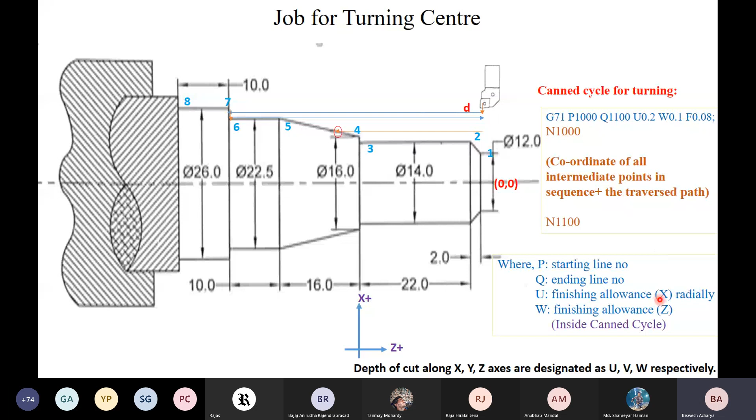Okay, still after this machining, there must be some finishing allowance. This is given by U and W. U and W means finishing allowance in X and Z direction. Okay, so F is the feed.

Okay sir, so it is necessary to write N1000 and N1100. Then why is it not written on the right side? I am not understanding, means... this is supposed to be written on the left side.

Even if we may skip all this, that means N1000, then on the next line we may start from G0 X12. Okay, so it cannot be, I think it can't be written on the right side.

Okay sir, if we are simply skipping, so because this code we defined can only write once, P1, for the entire code. Yes, so this code must be defined only once for the entire code.

Yes, yes, see, on this finishing cycle, we are not defining the coordinates again. Again, when we are writing, the control will go to this line and it will execute all the dimensions up to N1100.

Yes sir, I understood. Okay, let me proceed, otherwise you will be late for the other things.

Okay, now once the job is done, we have to go for the parting operation. That means there will be a tool change, and it will come and it will simply cut this.

Okay, so this will be a new part. Okay, so for that, what we need to do, we must change the tool. And someone asked what is G28. G28, I told that this is just zero return. Means the tool changing cannot be done from any location.

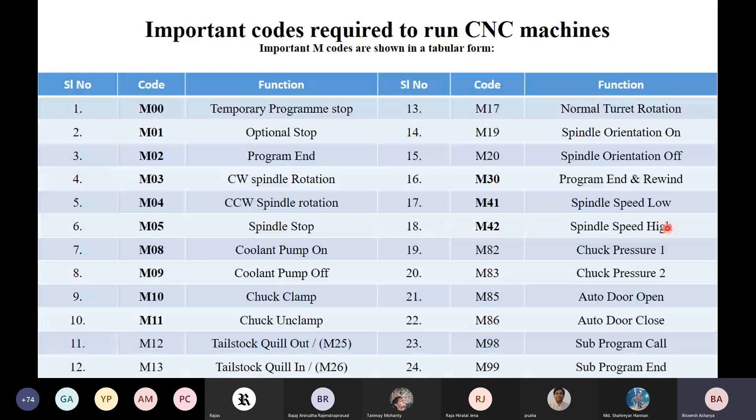M42, sir? M42. Yes, sir. The M42. Let's see again. That is M42. This is spindle speed high. That means we are operating at a spindle speed more than 1000 RPM. Okay. Spindle speed low means the RPM is less than 1000. M42 means spindle speed higher than 1000 RPM.

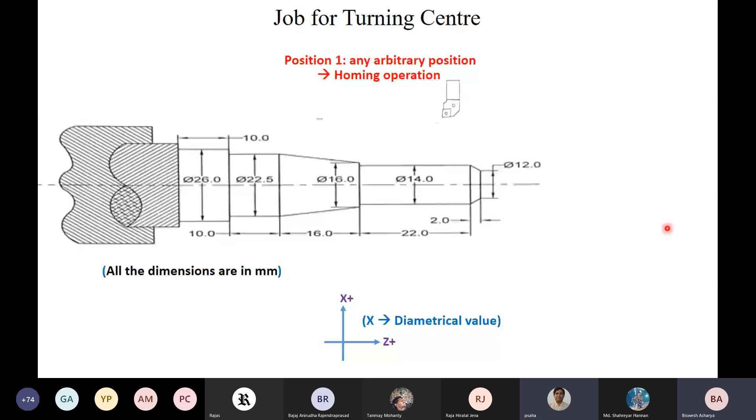Now, what is that? G0 X32. Okay, that means the tool will come to this point rapidly because there is no machining action. Then G0 Z minus 63. When we write X32 it will come to this location. Okay, and minus 63 means directly it will come to this location.

Now from this location my tool has to move up to the center, so it will be G1 and this will be a machining action. So this will be G1 X minus 1.0 at a feed of F0.2, because our objective is to cut this entire workpiece. Okay, at this point it must cut it. So we can move the tool from this point to the center, so that it will be a different part. So this is the code for that. Okay, I think we can understand this.

Sir, what is the G1 here, sir? G1 is the linear interpolation. Sir, that is G01? Same. Sometimes we can write G01 or G1 also. Both are same, sir? Yes, yes. Okay, sir.

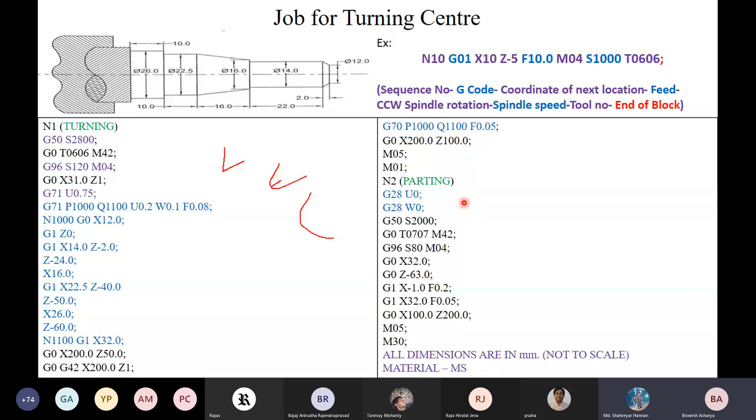So now this is over. Now we are going for the machining center, which is similar to your milling operation. See here, there will be a G40, G41, G42, but here it is not the nose radius, it is the cutter radius, because in milling or machining center we are dealing with an end milling cutter.

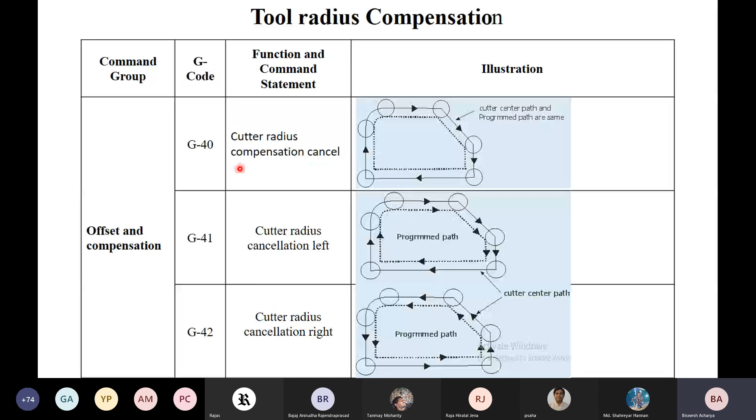Now, see, I want my tool to move from this point to this point. The tool will have some height and diameter, and we always write the code for the center of the tool. If the tool moves from this point to this point, see, don't you think that this extra material will be cut? It will deviate from the desired dimension; the desired dimensions will not be met.

So what we can do, we may move this tool to the right of this line so that my next tool position will be somewhere here. It will be like shifting the tool from this point to this point. Now, if I try to move to the next location, it will move in such a manner that this profile will be met. Is it clear?

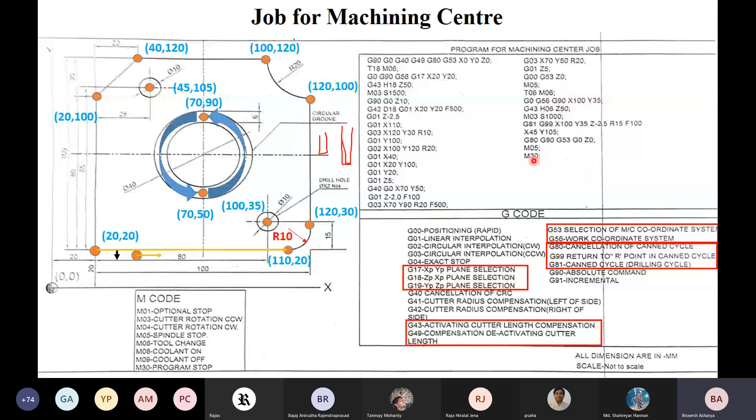Another thing: in a turning center there is one spindle, so at a time we can use only one job. But in a machining center the tool is rotating, and a number of jobs can be mounted on the same table. So for each job we can define a new coordinate system and fix it to some location, like work coordinate system G54, G56. So what is the benefit of this?

Suppose we are machining this part, and due to some reason we have an urgency to machine another part. We can stop machining this and machine the other part by defining another coordinate system. And once that part is over, we can come back to machine this part. Suppose there are 100 lines, we have done 50 lines here and switched to the other part. After that is over, we can go back to this work coordinate system and start from the 51st line.

Now let's see some of the advantages of CNC machine. So only 6 different work coordinate systems, or maybe more? I think 6 work coordinate systems can be defined, or in some machines that may vary.

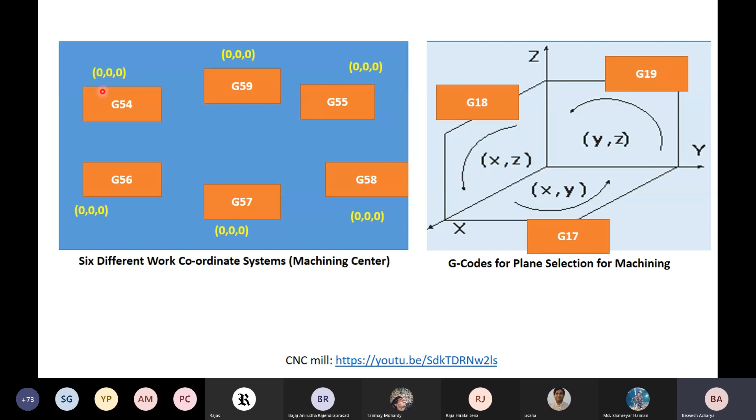Advantages of CNC machine: there will be no involvement of the operator. He just has to turn the program on and off, so less skilled people can also operate the machine. There will be some software; CNC machines can be updated by improving this software, and training can be done through virtual software. So we do not require any human intervention. We just need the human for work loading and unloading. Other things the machine will take care of itself.

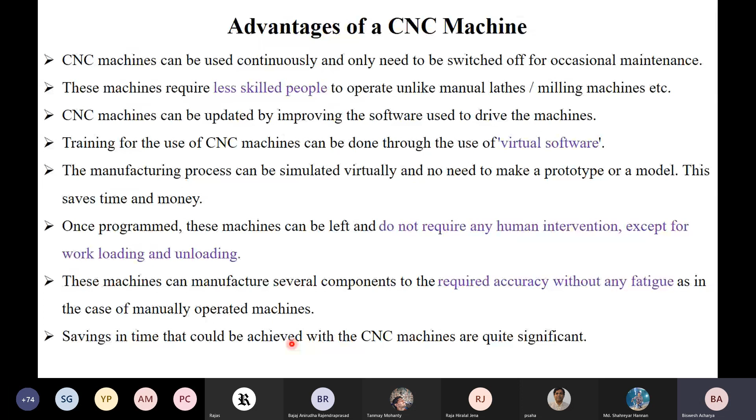These machines can manufacture several components with required accuracy without any fatigue. And significant savings in time can be achieved with CNC machines. There will be rapid actions: when no machining takes place, the tool may move very rapidly, so it saves time and may increase productivity.

Now some of the disadvantages. It is definitely more expensive than manually operated machines, and we don't need any skilled person. There is an increase in electrical maintenance, high initial investment, and higher per hour operating cost than the traditional system, which make it expensive. Suppose we have 10 conventional lathes, we need 10 workers. But with 10 CNC turning centers, one operator can operate all the machines. So it may lead to some kind of unemployment.

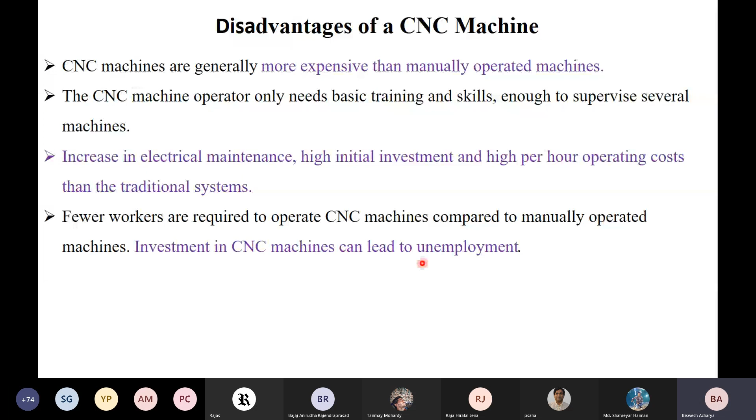Sir, are the functions of the lathe machine and the CNC machines different or the same?

So all the functions of a lathe machine can be done by this CNC machine? Yes, the CNC turning center can do them, but it will be expensive. And as I showed in the first slide, the desired dimensions can be achieved with less deviation. So there may be a doubt: if we have a CNC lathe or turning center, why should we go for a conventional lathe? That is a basic question.

In some cases we don't want this tight tolerance. If there is some deviation in dimension and that is not a problem, then to reduce the cost of machining we may go for the conventional lathe. Otherwise, suppose you have to manufacture a spindle which will be mounted on a different part. If the spindle has some deviation, it cannot be fixed at that location. So in that case we cannot do it with the conventional lathe; we have to choose the turning center.

In another way, in some cases we are dealing with costly material whose cost will be a few thousands or a few lakhs. In that case, if my part is rejected, it will be a huge cost, a huge demerit. So in that case we have to select a CNC based turning center or machining center. We can't go for the conventional lathe or milling.

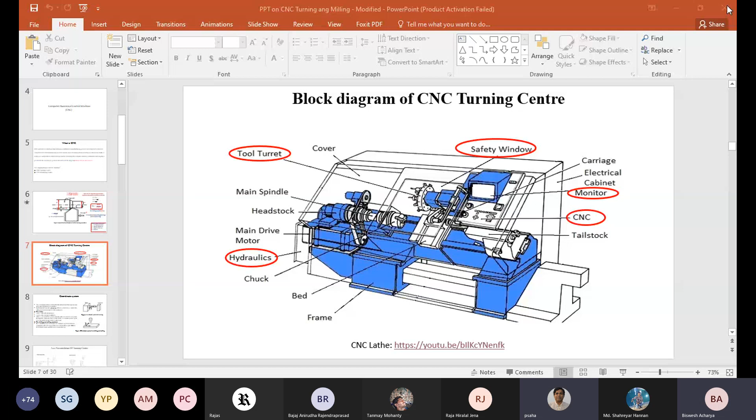I think our class is over, but we have to see a video on CNC mill. Once this video is over, we can take some queries. Should I play the video? Yes, sir. Then you may have to unshare. Okay? Yes, sir. After you complete. Yes, sir, I just unshared it.

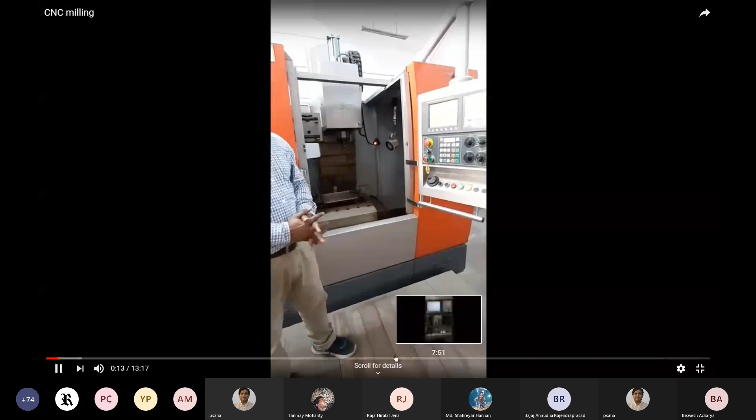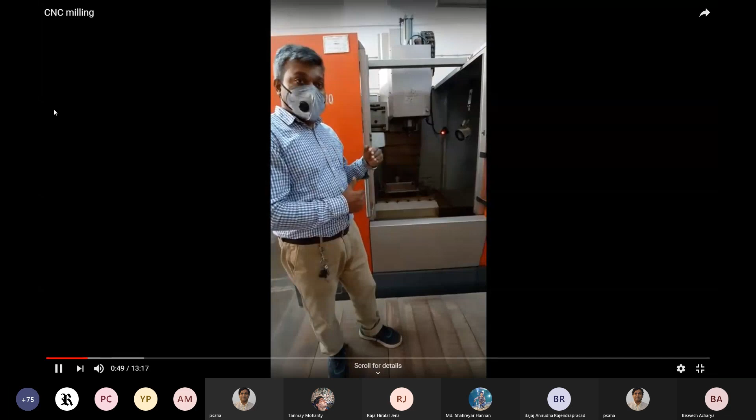This one is the VMC, Vertical Machining Center. This machine has 3 axes: X, Y, Z. In X, the table moves towards the operator's right hand side, that is the X positive direction, and towards the left hand side of the operator, that is the X negative direction. This can move up to 600 millimeters in this machine. Y is the transverse direction. When the table comes towards the operator, that is the Y positive direction, and when it goes towards the spindle, away from the operator, that is the Y negative direction.

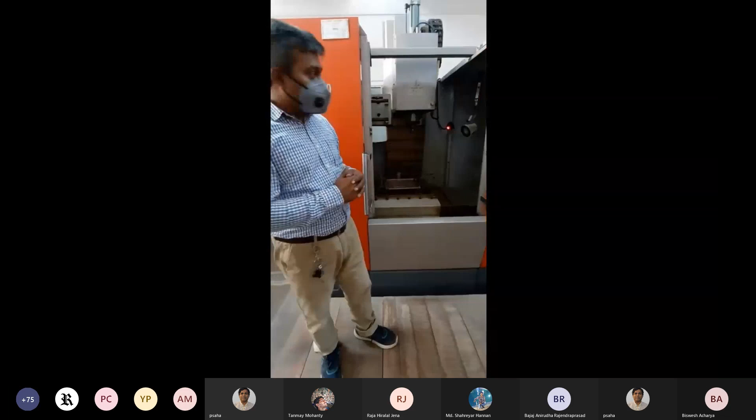And the Z axis: when the tool comes towards the workpiece, that is the Z negative direction, and away from the job is the Z positive direction. The Z axis can move up to 500 millimeters, and the Y axis up to 450 millimeters. There are 4 servo motors: 3 for the movement of all 3 axes and 1 for the rotation of the spindle. Now we'll see how to move the axes using different modes.

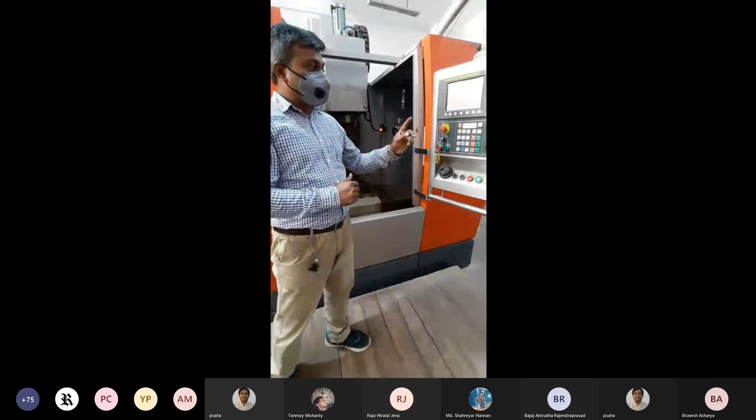Now we'll use jog mode, with the mode selector. In jog mode, we'll move the axis. Here the direction is there, and the feed selector. I'm opening the feed. Now I'm going to move in the X negative direction. X axis is selected. This is the axis selector, this is the mode selector, and this one is the feed selector.

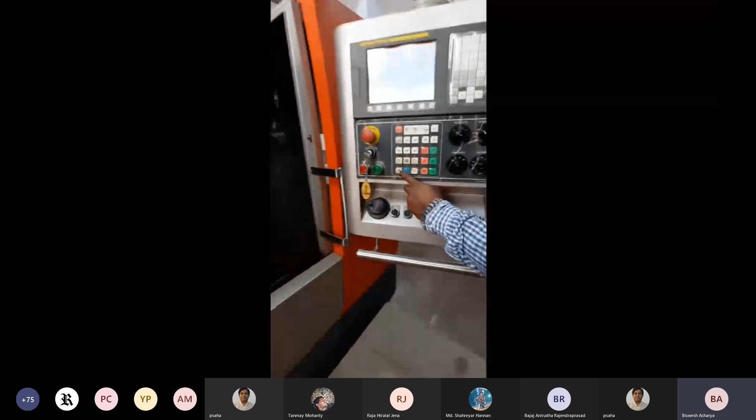Now we're going to move X towards the X negative direction. I'm pressing this direction button. X negative direction, the axis is moving. Now X positive, towards the left hand side of the operator. X positive.

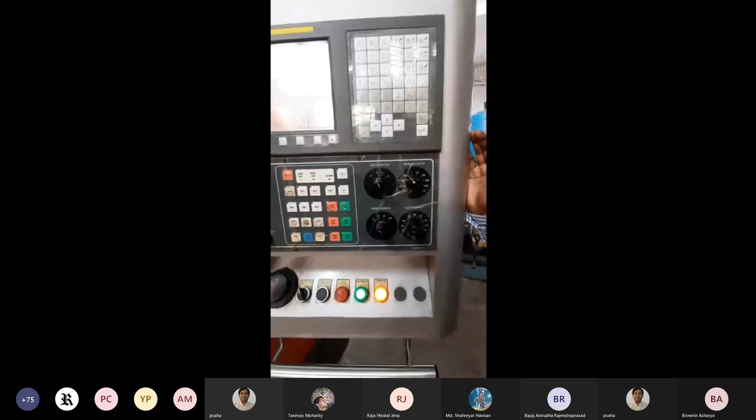Now the Y axis. Again I am selecting the Y axis using the axis selector. Sorry, we will select the Y negative direction. Y negative is away from the operator, towards the spindle. This one is the Y negative direction.

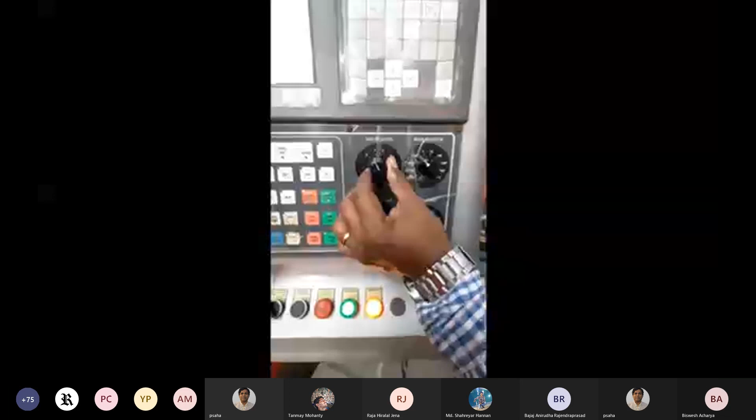And Y positive towards the operator. Y positive. Now Z axis. Again we are selecting the Z axis using the axis selector. Z axis is selected. And now we'll move the spindle towards the workpiece, downwards. Z negative direction. This is moving. And Z positive direction. This time it is going up.

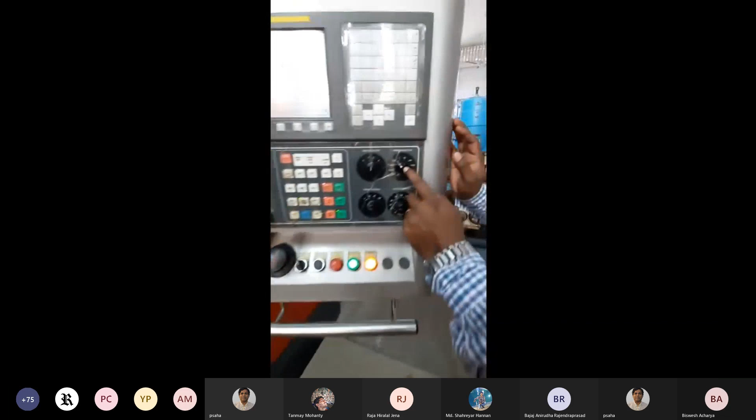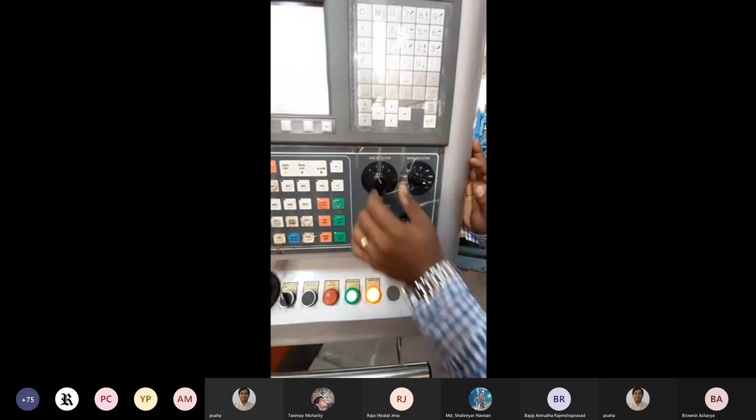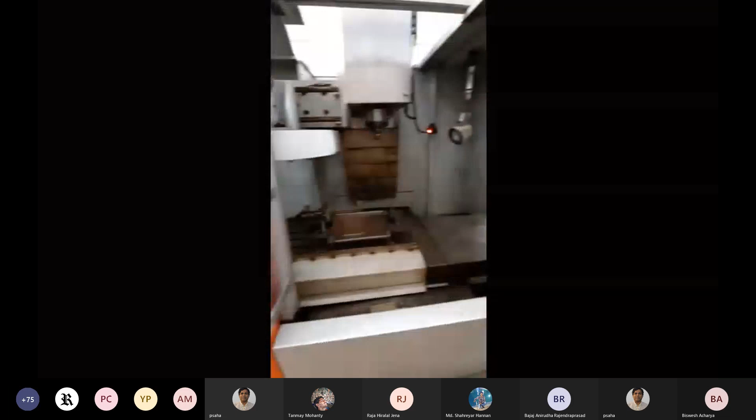Okay. Now we'll select the reference. This is the reference mode. Z axis. This time we'll open the rapid override. And positive direction is selected now. This is moving towards the Z axis, Z0. Y axis. Y0. And now X axis. This is X, Y, Z. This is the machine origin.

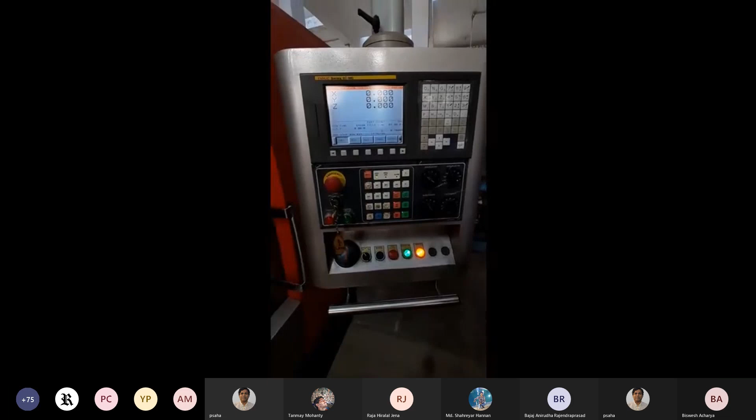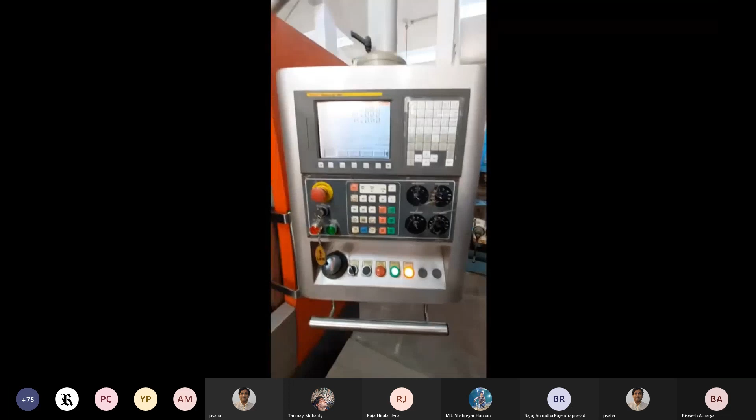And now we'll see how to write a very small program using MDI mode. There is a mode selector. We'll select MDI mode to write a very small program. In this mode, you can write a maximum of 6 lines at a time. This is the MDI program screen. MDI. These are the soft keys. Okay. In this case, you can write a maximum of 6 lines at a time.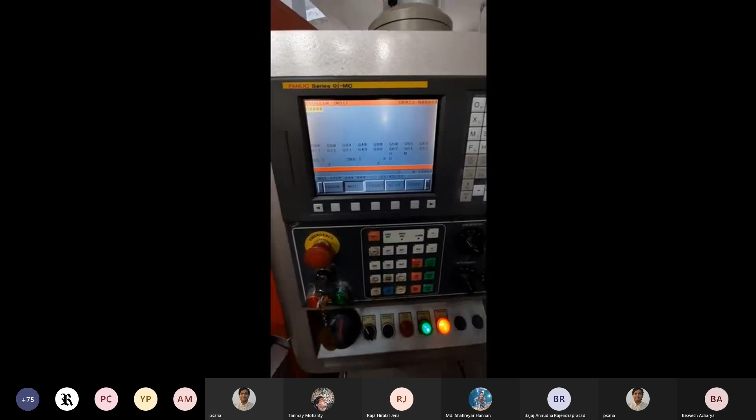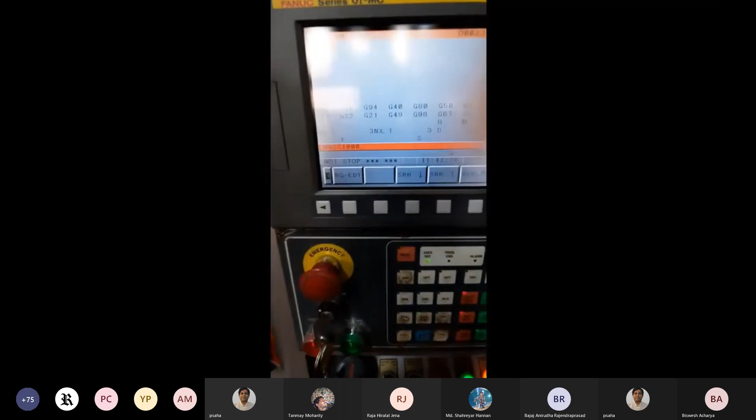Now we want to rotate the spindle using a program. Now I'm going to write the program. M03 S1000. End of block insert. The program is written. Now to execute this program, we'll press cycle start, this button. I'm pressing this. The spindle is rotating now clockwise.

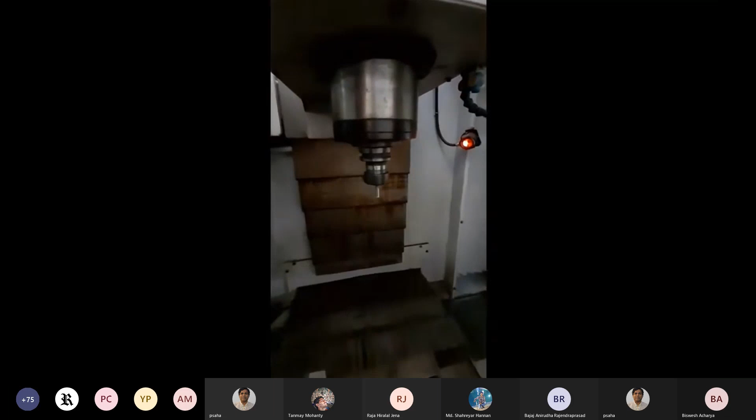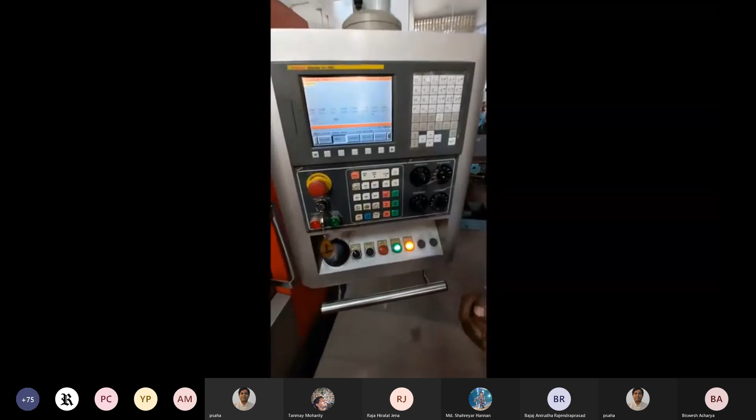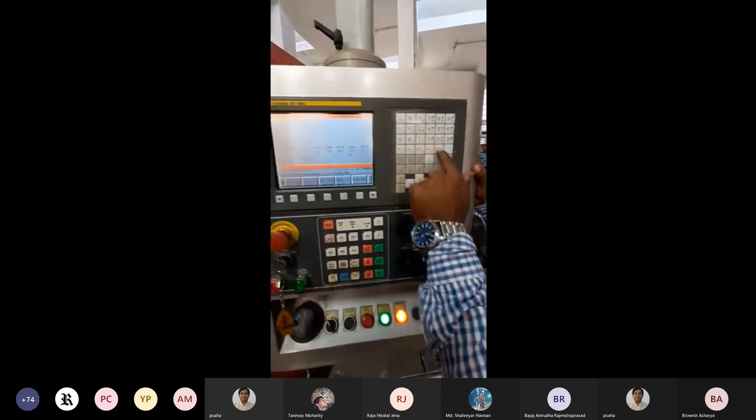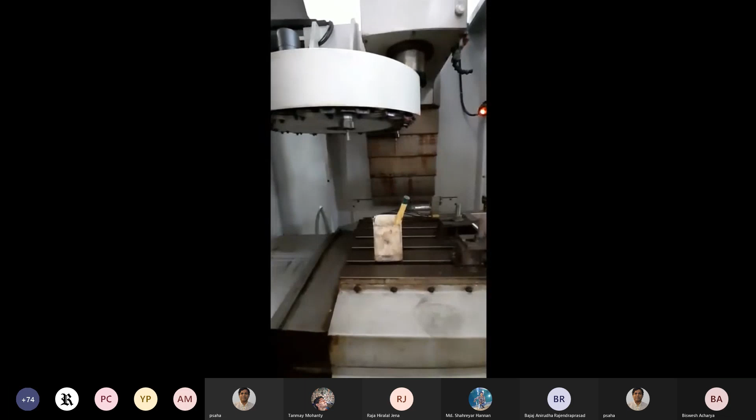Okay. Now we'll see how to change the tool. Previously, we have seen in the turning center, that is the CNC lathe machine, we have used the turret. And here in this machine, we'll see the tool magazine and ATC. Okay. So now we'll write a program to change the tool. We'll call the tool. The code is M06 to call the tool, and we'll call tool number 9. This one is tool number 3, and tool number 9 is coming. Tool number 9 is changed.

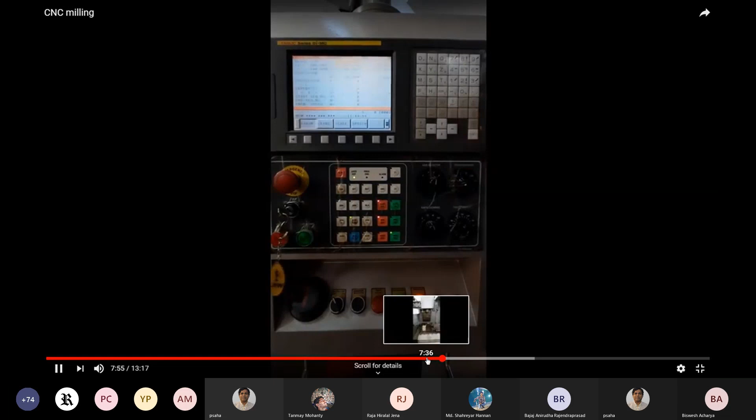Okay, now we'll see the simulation of the program. Which one are we going to execute? This one is the program. Okay, already I called this program on the screen, and in the auto mode. Now here is the position of the tool. The tool is called from the home position to the job origin. Okay. And now the linear interpolation along the Y-axis, it is cutting.

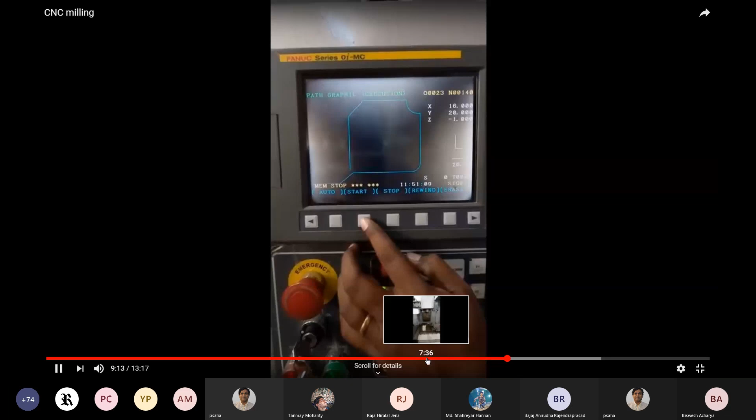Then this one is a circular interpolation counterclockwise. Along the Y-axis, this is again linear interpolation. The next block, this is circular interpolation clockwise. Along the X-axis, linear interpolation. And at the same time, X and Y will move in the transverse direction. Okay. Then along the Y-axis, linear interpolation. Circular interpolation,

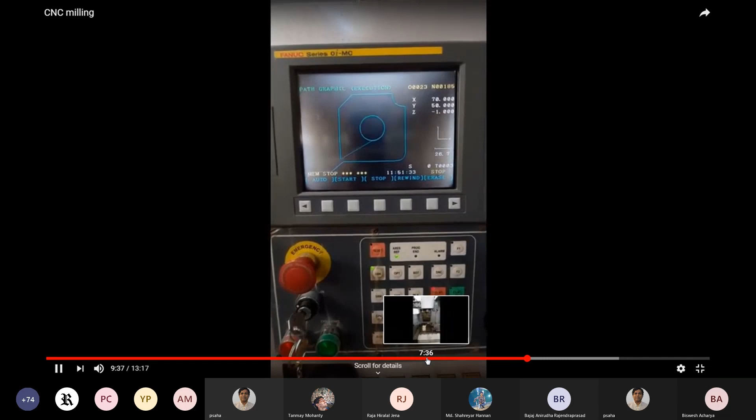again circular interpolation. Actually, what will happen practically, the cutting tool will not be moving. The cutting tool can move along the Z direction. Practically, the table will be moving along the X and Y axes. Now the program is selected and the mode is selected. We are going to execute the program.